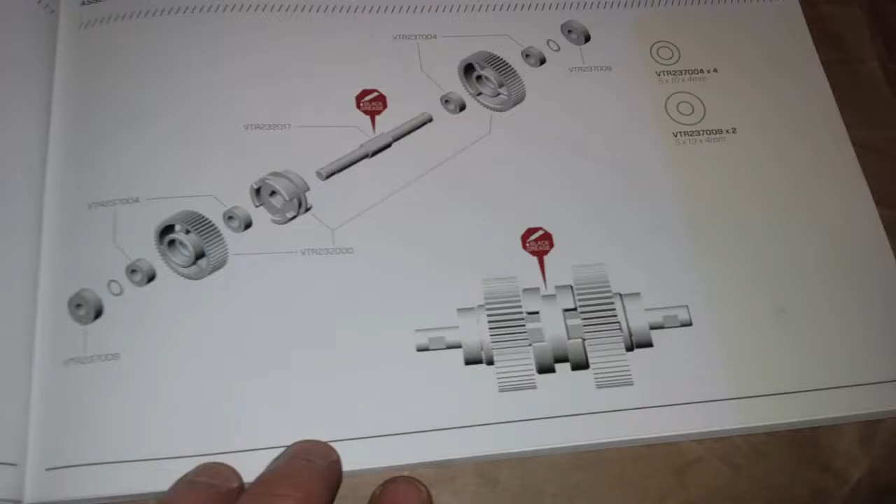Big flash there. Alright, so that is all together right there. The last little thing that I need to do is put some more moly grease on here where the shift fork slides in between these gears here.

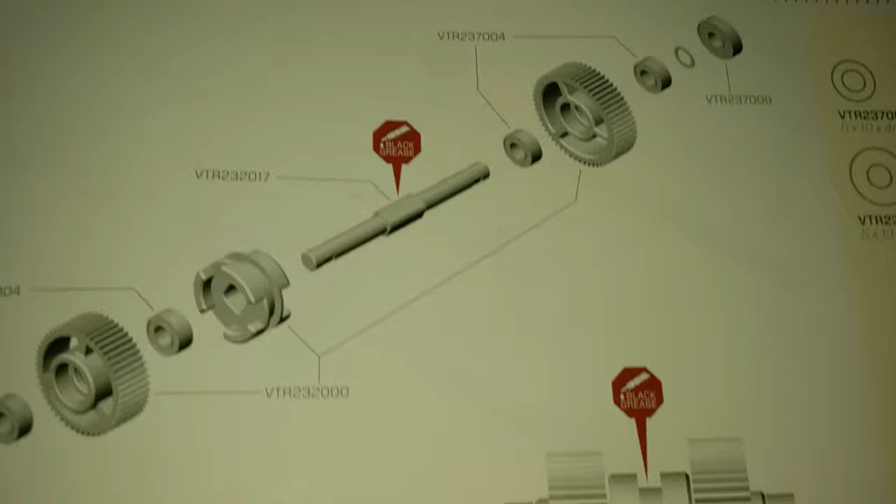But everything is done on this page, so I'm just going to go ahead and turn the page. I'll worry about that here when I put it back together, or when I get to that point.

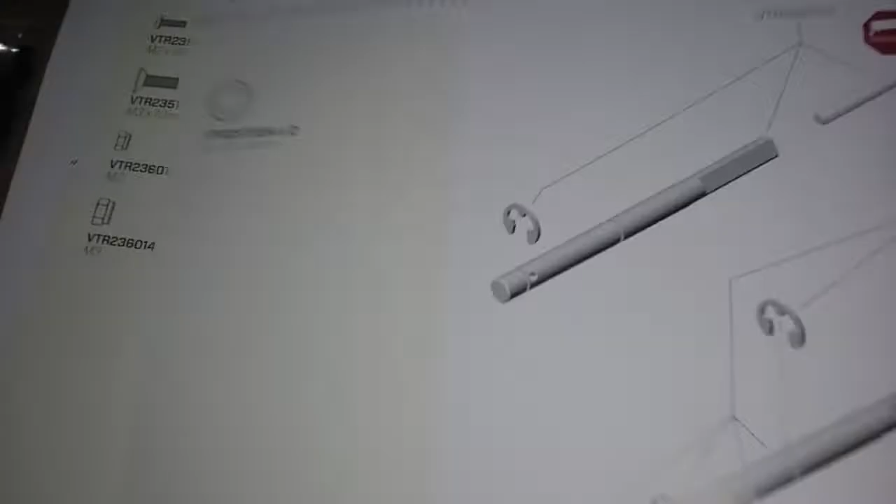So page A3, what do we got here? Well, I'm assuming that's a ball bearing.

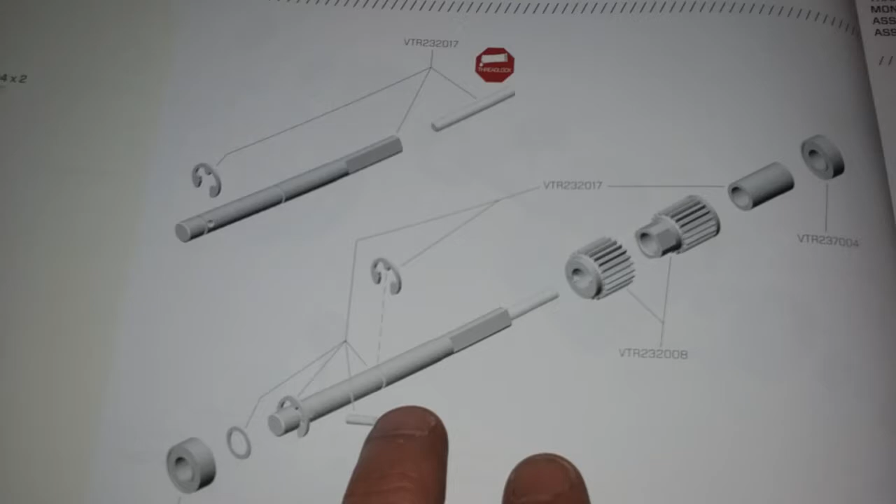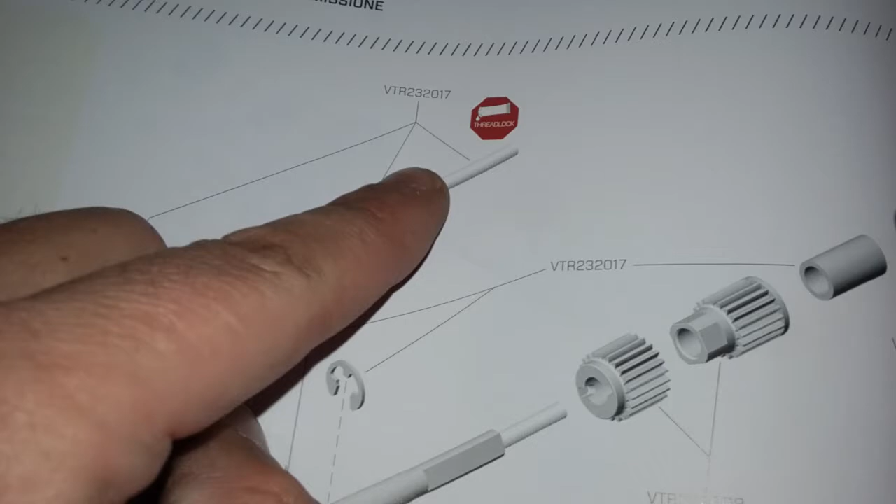Alright, well, we'll get this little counter shaft hooked up with these idler gears or whatever. Looks like we got a rod, C-clip, washer, bearing, another C-clip, some sort of pin here that's sliding down the middle of that shaft.

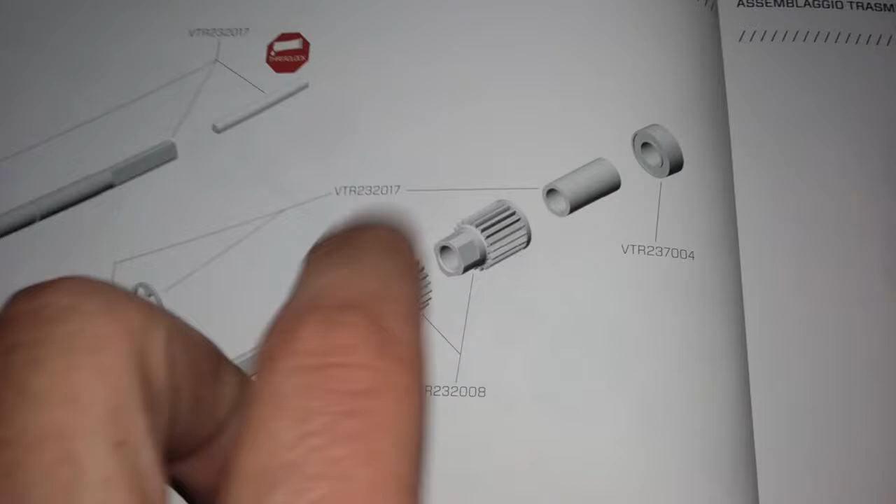That might be a threaded rod, because there is a threaded rod in this package here. And that, I'm sure, this is probably going out to the spur gear. So that is probably what the spur gear attaches to, I'm thinking. Just guessing. Alright, so I'm going to start putting this little mess here together and move on to my next step.

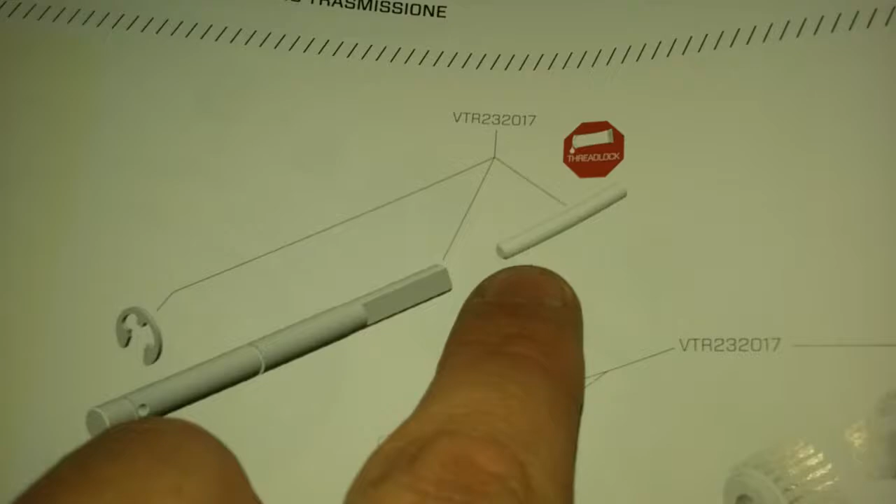Thread lock. That's where they want you to use a red thread lock. Alright, I'll probably use red there, I'd imagine. I know if you go red, you're going to be dead, but I'm thinking that's for the spur gear, so I might want to go red on that, I guess.

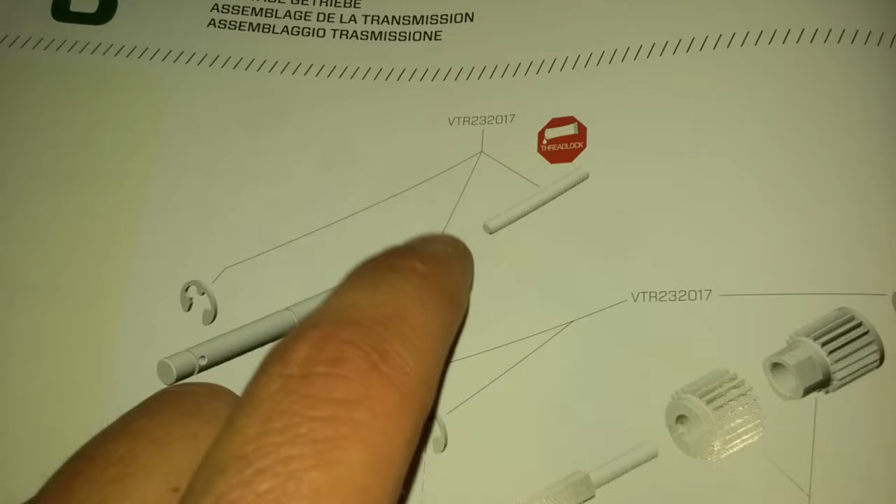And I left a part out. A3, so I'm assuming it's A13 is the bag that we need, with the shafts and the bearings and a couple screws in there and whatnot. Shift fork in here, because that'll be on the next page with the shift fork assembly.

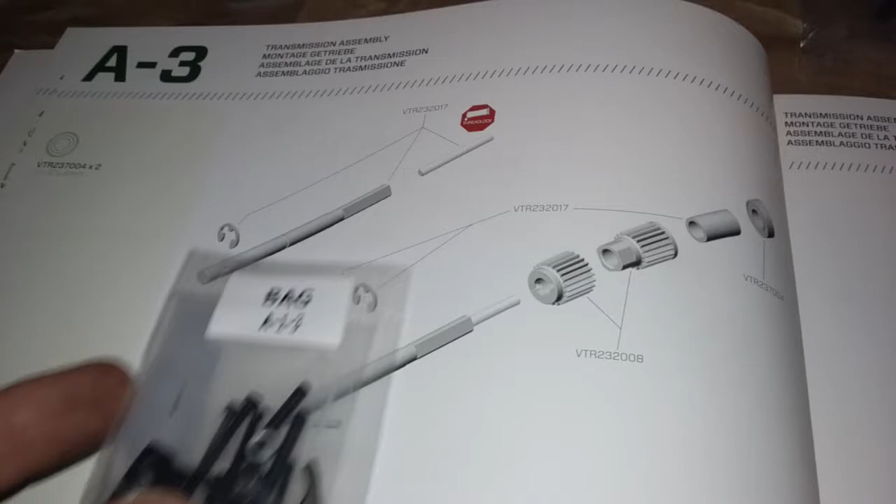Alright, so let me crack this baby open and start assembling this stuff. Like I said, I'm sorry guys, I wish I had something to hold the camera with.

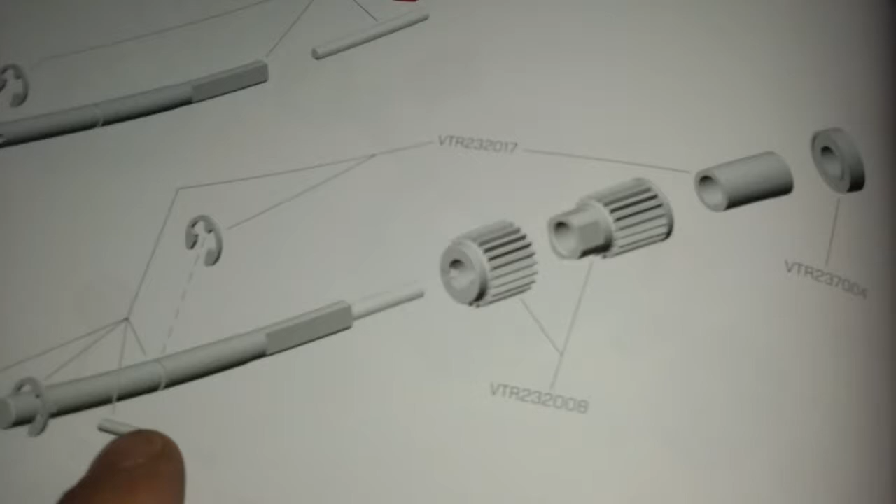And we're back again. Well, you know, I'm looking for the rod for these here gears to sit on, and they're not in the bag that they're telling me to go to, but they are back into this bag, which is the one that had the rest of the gears in it.

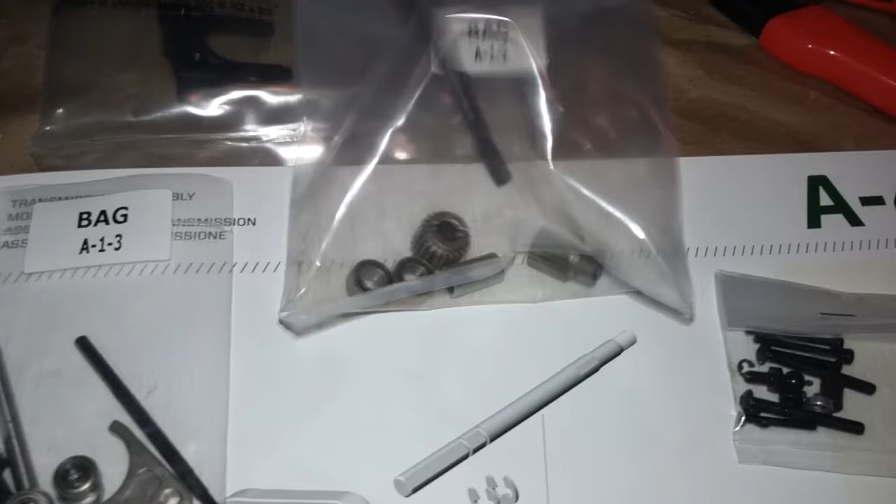And that's probably the spacer and everything else too, so even though it says we're on page A3 here, there is, like I said, they need to do some better labeling on this stuff, take out some of the guesswork.

I mean, I'm able to figure it out okay, but a little tougher when you're bouncing back and forth between the camera and everything else, but nevertheless, poor labeling. Poor labeling.

And this is just something I wanted to point out. I had to go back to the original parts bag for these C-clips. And this last washer that I was kind of wondering about, that needs to go on too. And then this little pin here, that needs to be installed as well as that threaded rod.

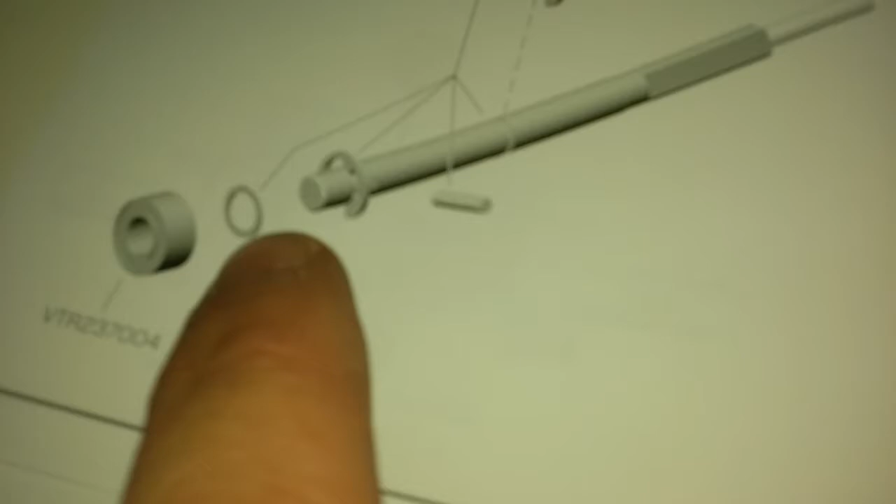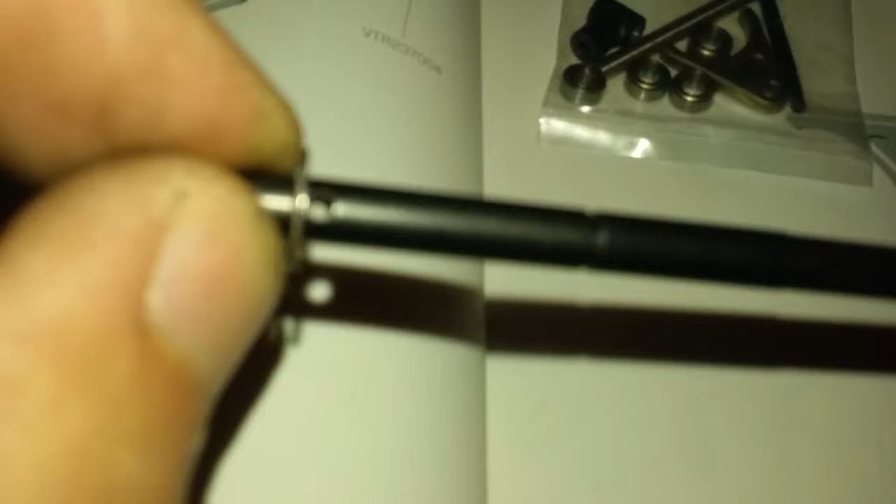So there's where our washer is going to go, in between the C-clip and this bearing here on the end. And then our little pin's going to be installed, which is, I don't know if you can see it or not, but there is a little hole in the drive shaft right there. That's where that pin's going to be installed.

And then there's looks like another C-clip that goes on after you start installing these gears, and that spacer and the other bearing.

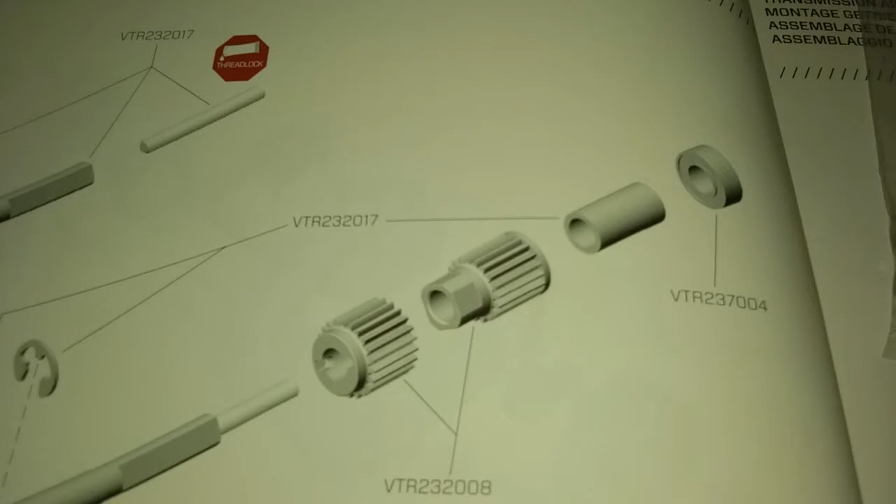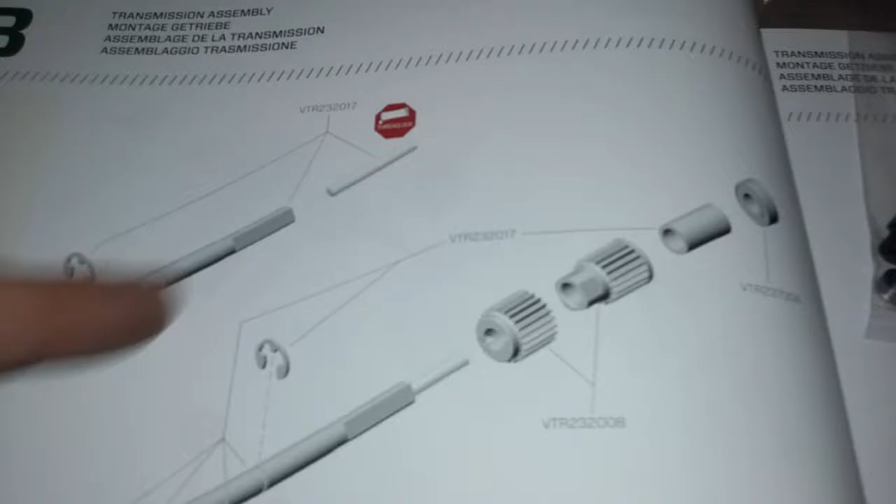But yeah, like I said, there's no mention or reference to that parts bag. I mean, what do you see on this for parts needed? 2 bearings. There's nothing else telling you that you need all this other stuff. Transmission assembly.

Go over here to the next page. There's nothing here other than showing you that it's the shift fork assembly. But there's no, you know, descriptions on what all you're going to need.

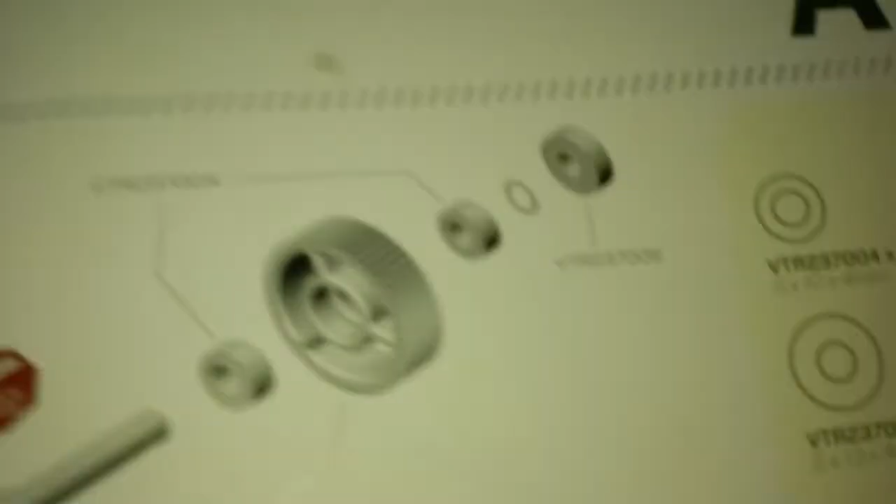Like on page 1, you know, it says A1, but it's telling you that, okay, you need 2 or 1 of these screws and 1 of these screws and 1 of those nuts and 2 of those nuts. Go around to this side, you know, they show you got all these gears here. No real description on that.

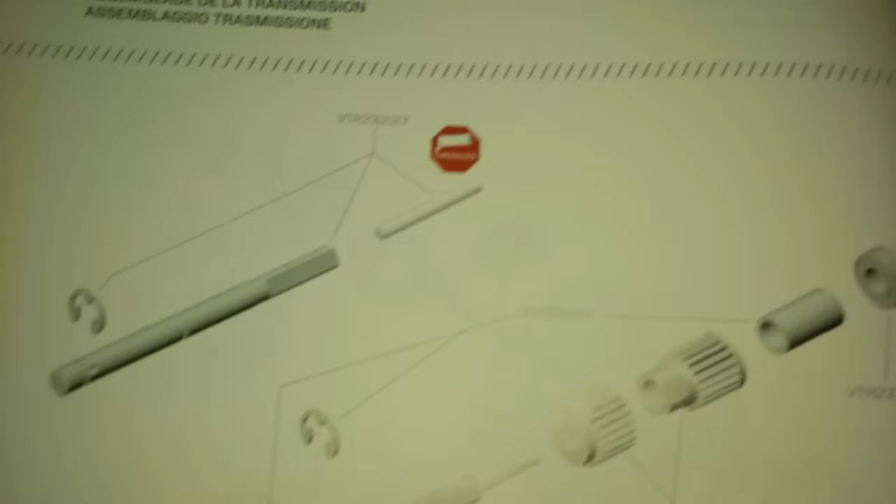Show you your bearings. Yeah, you need 4 of these and 2 of these. But you get to this page and what? They just show you bearings. They don't show you anything else or what bags to find these out of, other than it says A3 on it.

And these bags are all A1, A1-2, A1-3. I think it was sitting around here somewhere. Here's another just straight up A2.

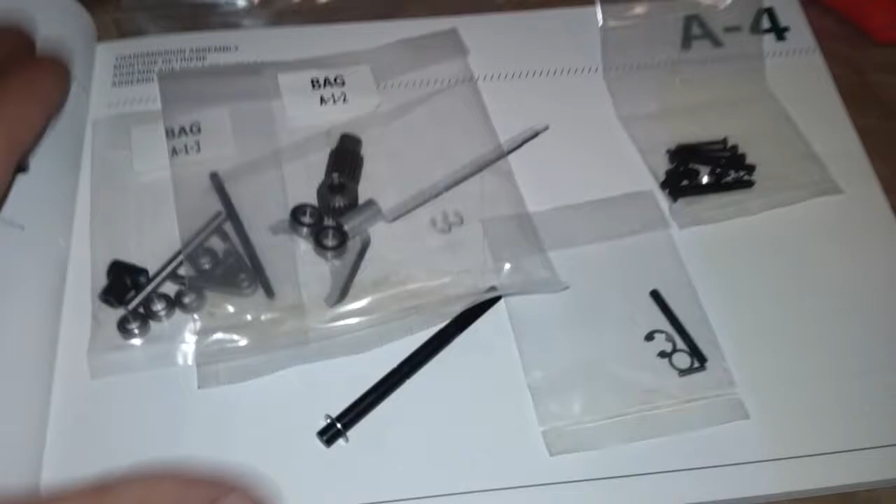This bag had no label on it. That's all I'm saying, they could be a little bit better with their instructions on how to put everything together. I'll have no problem putting this together, it's not going to faze me a bit, but for other people, a beginner putting a car together for the first time, it'd be a lot easier if they had a better description and better layout with all their stuff.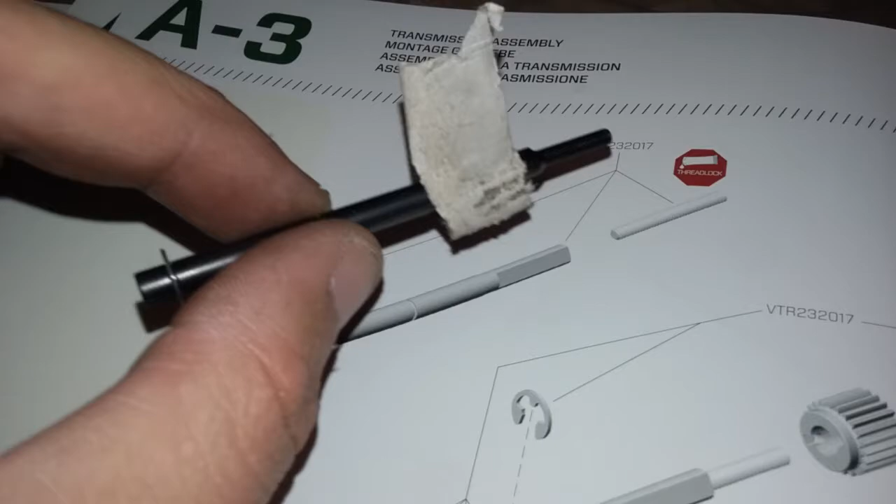Alright, bad glare again. So I'm at the point here where I was putting this Allen set screw into the end of the shaft here. They don't really tell you how tight to tighten it down. I'm pretty sure it's for the spur gear.

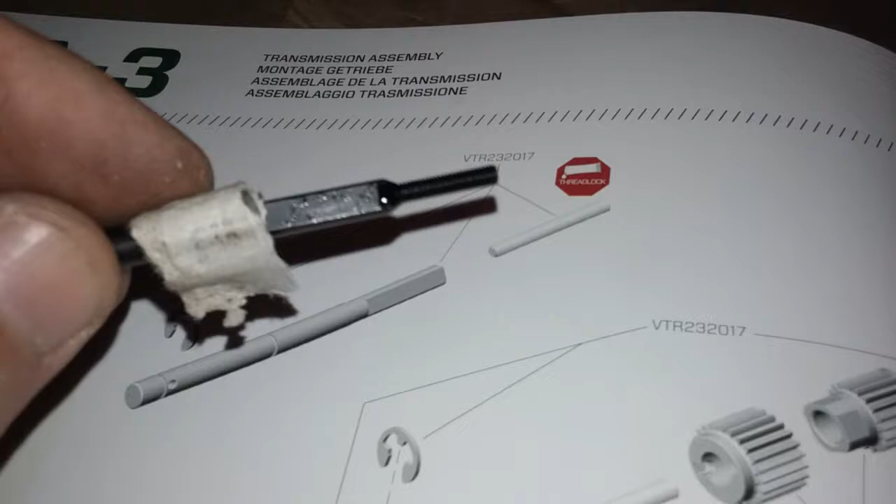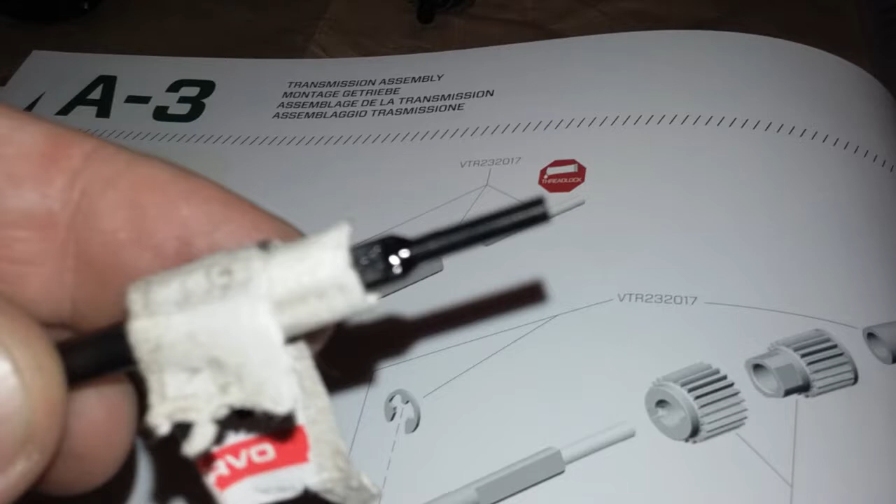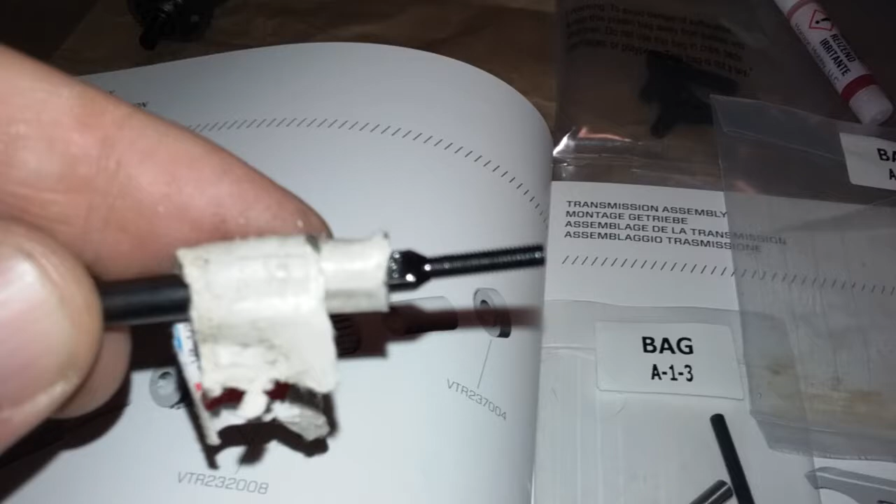I did bottom it out into the shaft where it's supposed to be, I'd imagine. And there's really nothing to hold onto the rod with, so I wanted to make sure I didn't scratch this up. There's a flat spot on this rod, so I just wrapped some cardboard around it and lightly gripped it with the old Vise-Grips there, just so I wasn't going to scar it up. Then I snugged that thing down a little bit, gave a little extra twist on it.

More than I could put on with just holding it with my hands. Not so much that it's never going to come back out again, but I did snug it down a little bit, just FYI. Try to move it over from the cardboard over to here first.

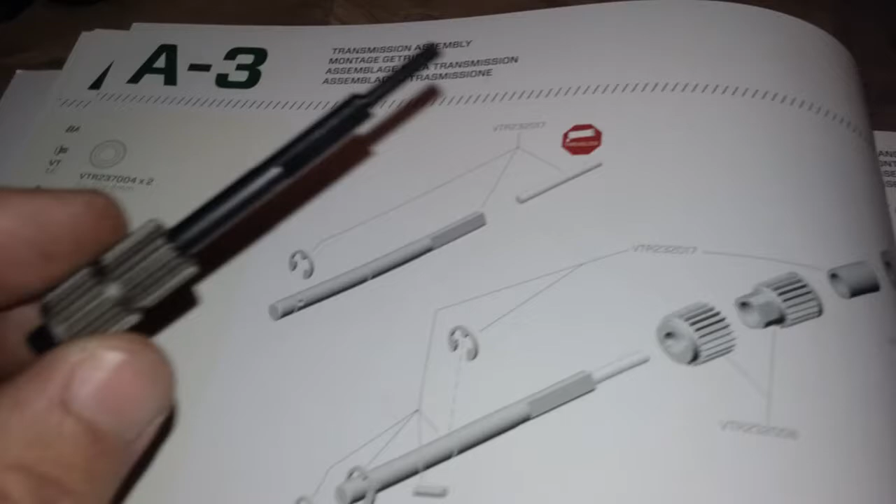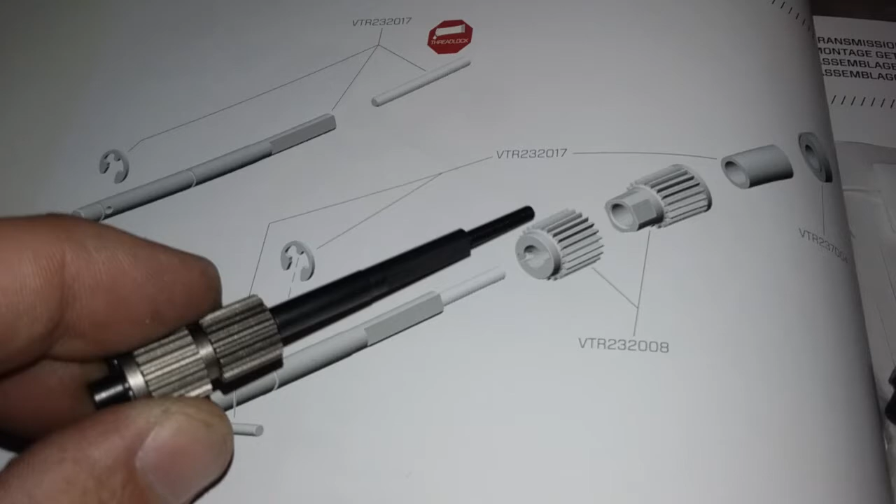Alright, so this is the next step. I'm going to put this washer and bearing on last. So I put in a little hairpin, or steel pin, through the shaft here. I slid on the smaller idler gear, the fatter idler gear, and then the next one to go in after that. Now I have to snap on one more C-clip right there on that little ring on the inside, just next to the gear.

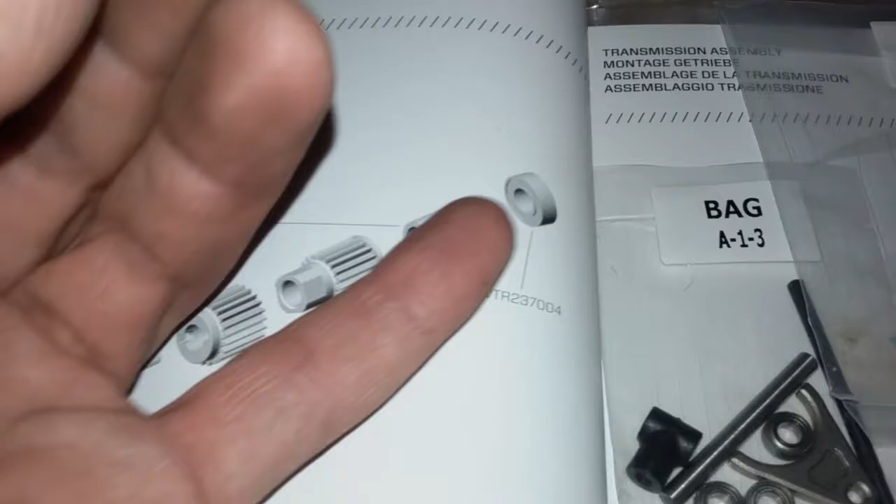It's probably not going to focus on it, but it's right snug with the side of the gear here. Then after that, slip on this little spacer and another bearing. I believe this is the spacer, and those are probably the two bearings. There's my last C-clip for this little portion of it, and this little washer. So I will pause it and do that real quick.

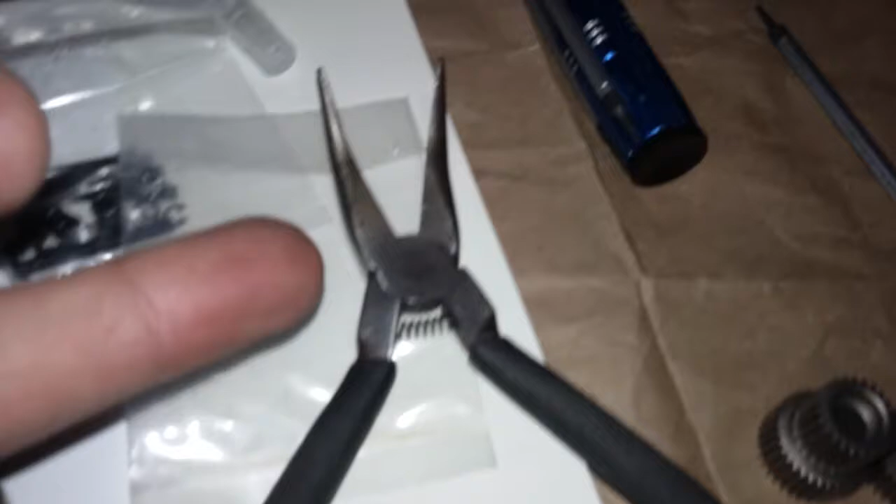You definitely need to be careful when you're installing that last C-clip. I use this little pair of angled needle nose pliers. You want to be careful that you don't snag any of the gears on the way down and scratch them up. Just something to be mindful of.

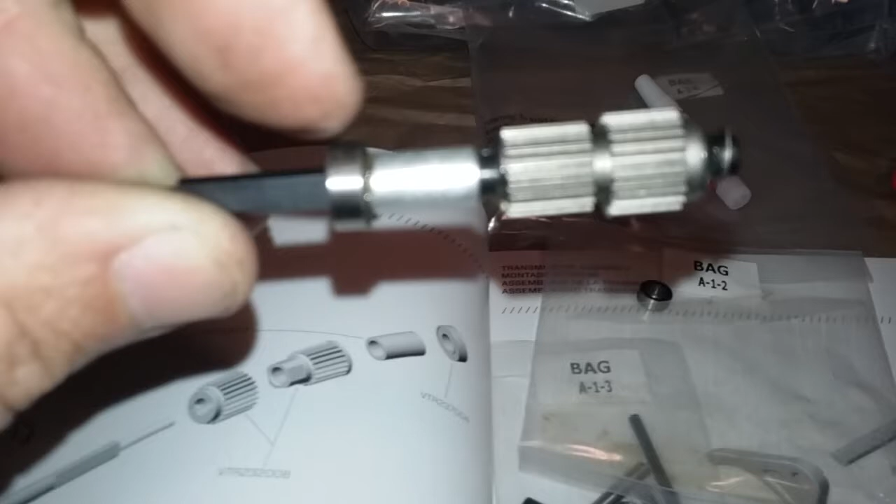Alright, so I put this little spacer on in between, right here, and then this bearing. I made sure to put some of that black moly grease on the shaft, moved the spacer up and down on it a couple times to make sure it had some lubrication, as well as putting a little bit more of that grease in between the bearing and that spacer.

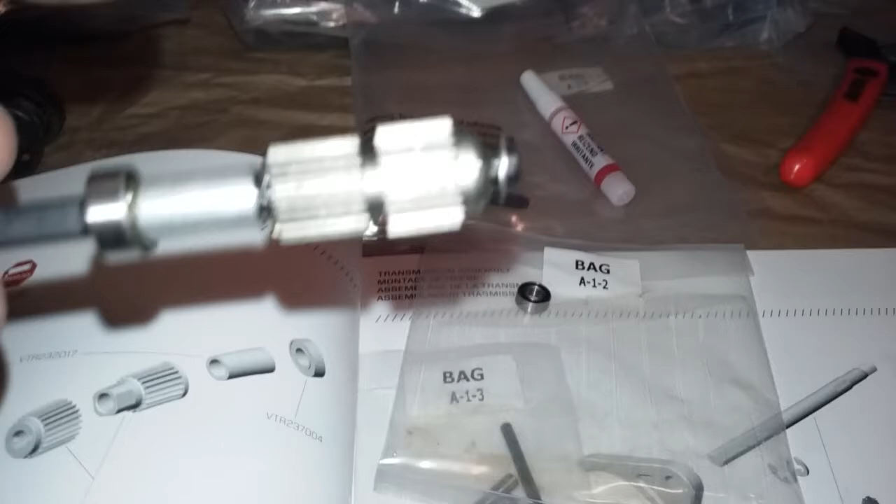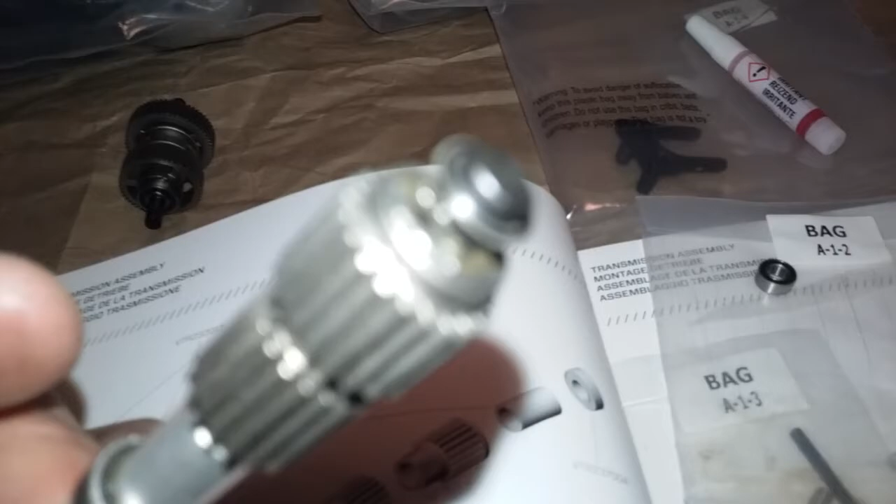At the end here, you're supposed to put this little washer on top of this C-clip and then slide the other bearing in. I did the same thing, put a little bit of that moly grease in between the C-clip and this washer, and I'm going to lay down a little bit more on top of that washer right before I install the other bearing.

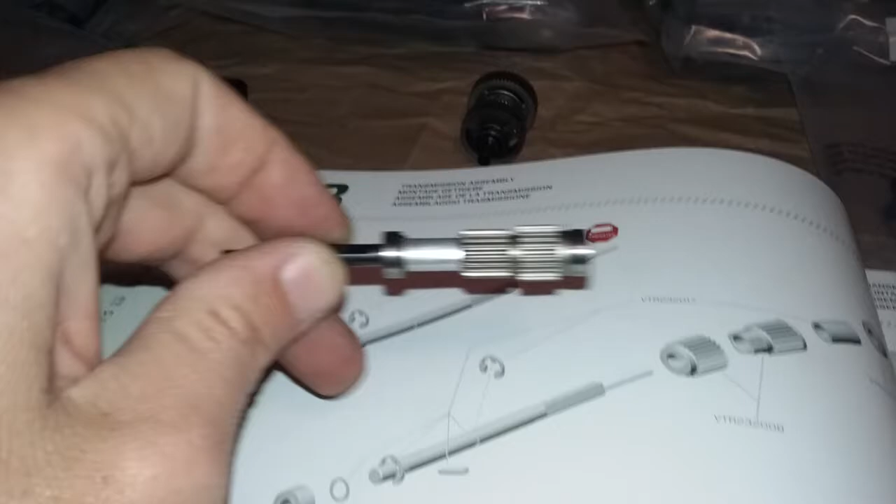Now the manual doesn't necessarily tell you to do that, as far as putting grease in between all those little points. These two gears sitting on the shaft aren't spinning, they're not going to be moving anywhere. But obviously the bearing's spinning, though it's not spinning on the shaft, it's spinning within itself.

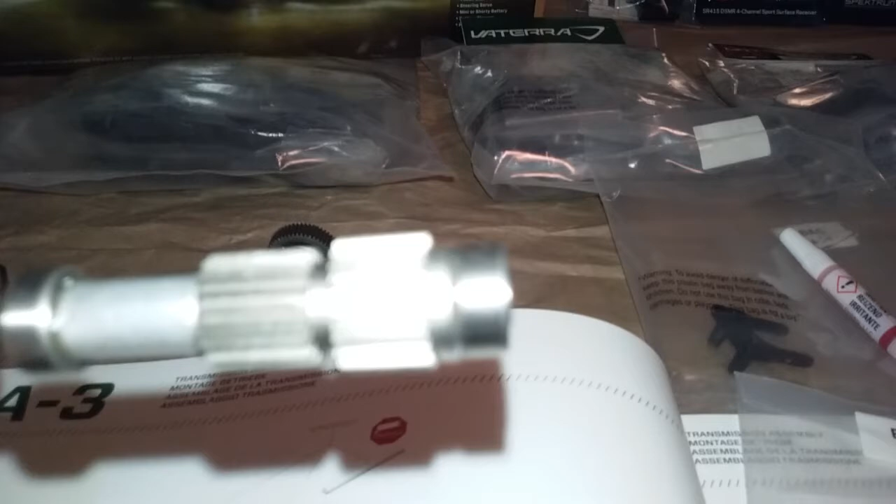But I'd imagine that little spacer there is probably going to do some spinning. And the washers in between the spacers and the C-clip, I'd imagine those are going to be doing some spinning too. So I just preemptively threw some grease on it. It definitely can't hurt.

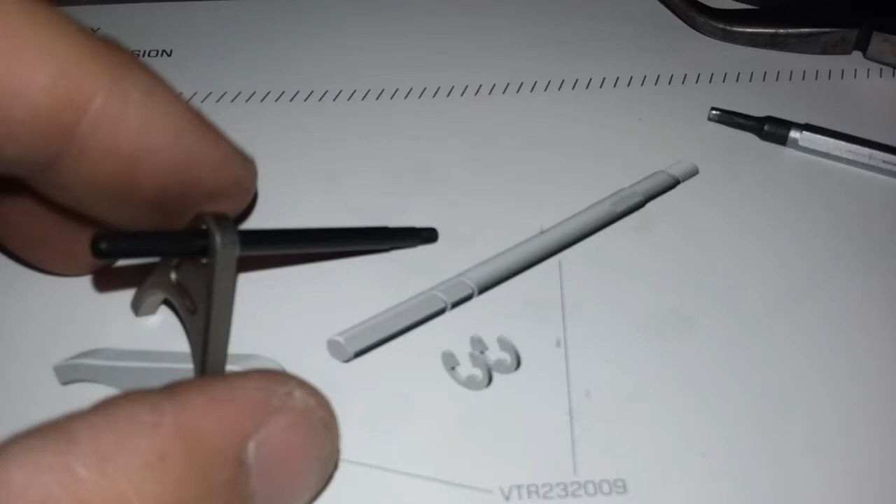Alrighty, so we are back again. I've got the little shift fork installed onto the shaft with these two C-clips on here. These little guys are micro, real small C-clips. Don't know if I can get the camera to focus on that guy.